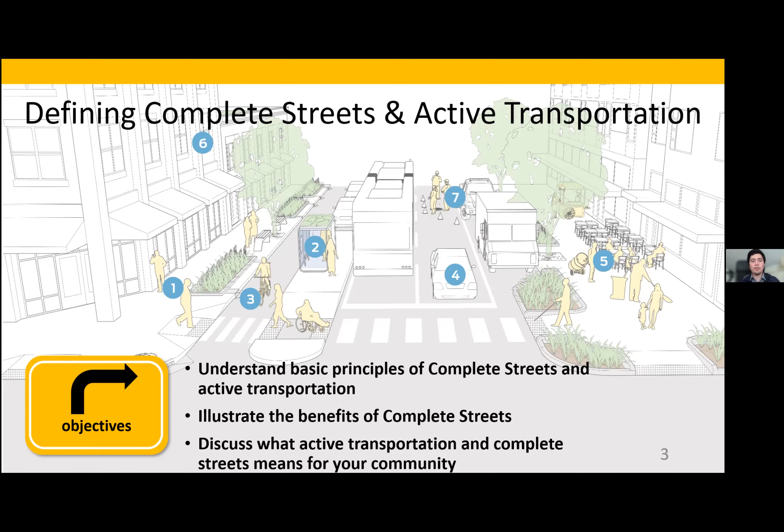There are a lot of tools to achieve that highest and best use, but ultimately it depends on what your priorities are and what you're trying to achieve. Yes, bike lanes are a tool. Yes, removing parking is a tool. But maybe it's not the tool that's right for you. So we're going to talk about all that as we go. A lot of content to cover, so here we go.

So what is active transportation? According to the CDC, active transportation is any self-propelled, human-powered mode of transportation. What's interesting about this definition is not so much what it's saying as where it's coming from. It's coming from the CDC, not DOT, not somewhere else. And the reason CDC is interested in active transportation is because physical inactivity is a lead contributor to many chronic health conditions in the United States.

Including obesity, diabetes, heart disease, and stroke. And active transportation is a potential tool that we can use to reduce some of these risk factors.

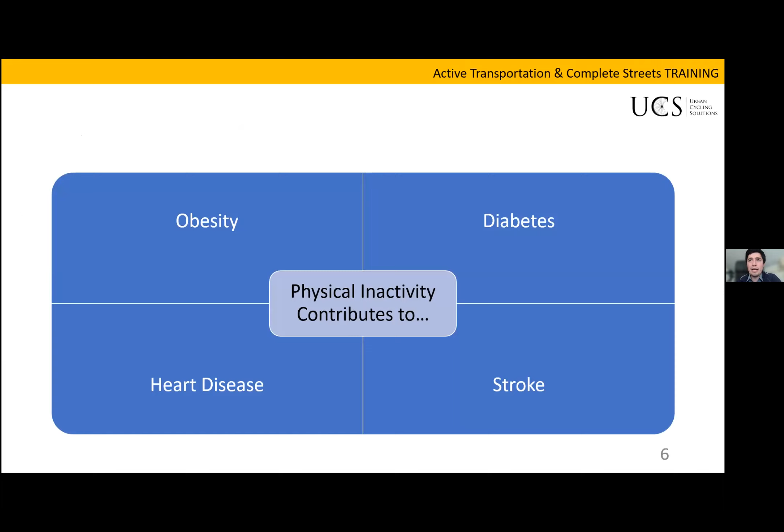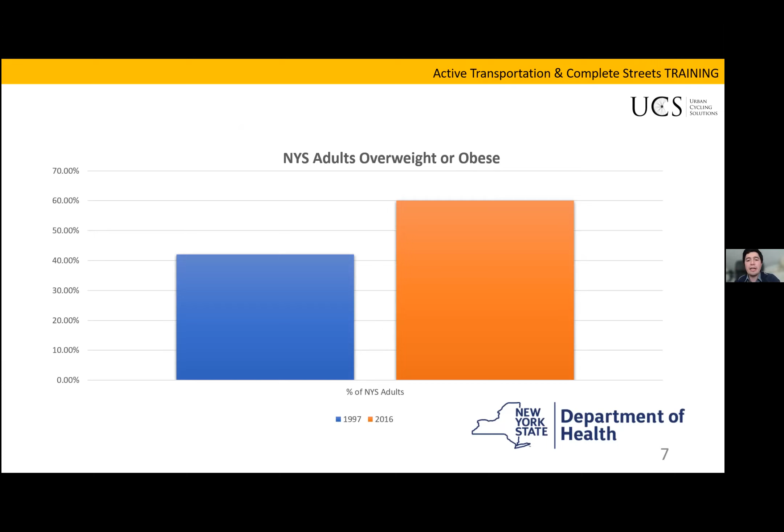If we zoom in specifically on obesity, what we find is that in 1997, just over 40% of New York State adults classified as overweight or obese. In 2016, that number jumped to 60%, so this is growing. In terms of cost, the state comptroller did an analysis in 2011 looking at the cost of obesity to the state, and they found that the cost of childhood obesity was $327 million, and the cost of adult obesity was $11.8 billion to the state. And that is a huge number.

And the reason that I bring this up is because a lot of communities that I go to think about things like complete streets and say, we can't afford this. This is great, but this is important—what are we supposed to do? When I see a number like 11.8 billion, I think we can't afford not to be thinking about ways to increase our physical activity. So, as you'll see later, complete streets is something that can be achieved with little to no cost in some cases. That's just something to think about in terms of framing this financially.

Now, if we start to think about physical inactivity, why is this occurring?

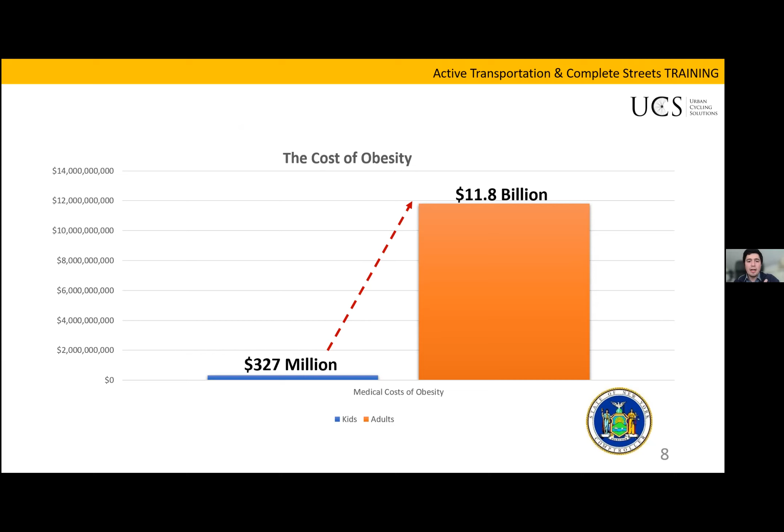Part of the reason is because Americans are spending more and more time in their cars because commute times are getting longer. And there's a variety of reasons for this. So there's population growth, there's congestion, there's really poor state of good repair. But that means that there are opportunities to reduce the amount of time that we're spending in cars. Maybe you can reduce your commute time by switching to a bike, or you can at least avoid congestion.

So if the CDC is right and active transportation is a tool for reducing our inactivity and getting us moving, why aren't more people getting out of their cars and jumping on bicycles or walking? Well, you can take your pick. There's a lot of reasons, whether it's poor pavement conditions, lack of safe infrastructure, wide intersections, congestion, fear of collision. All of these things prevent people from engaging in active transportation. And while some of these may be perceived, they are not unfounded.

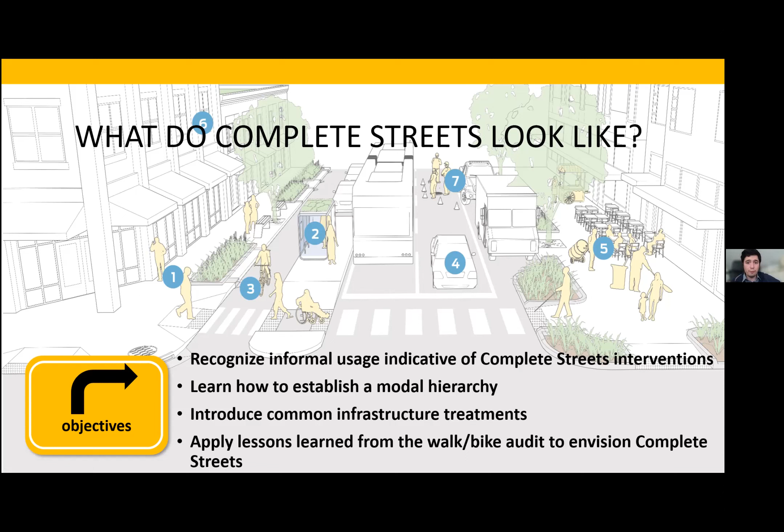That's something to think about. Clearly, people have found a path of least resistance. Maybe that's something we should formalize. Bikers tend to like to vet their routes and find the path of least resistance. So how do they get to transit? How do they get to local stores? That's going to tell you a lot about how you might want to think about planning a bike network.

Every community I've ever been to has sort of whispers of projects that have been around since God knows when. Like, oh yeah, that rail trail, they've been talking about converting that to a trail since the 70s. And, oh, that intersection's always been a problem, blah, blah, blah. These conversations stay alive for a reason. And for us as people thinking about improvements, we should be thinking about those questions. We should be thinking about those sort of rumblings and vetting them to see, oh, okay, there's actually an issue here, or there's an opportunity here for us to capitalize on.

And lastly, and most importantly, where are the kids hanging out? Do we have safe routes to our schools and to our playgrounds? Because that's really key. Kids are a really vulnerable population, and we want to make sure that it's safe and easy to get to the library, to get to school, to get to parks. So once we've started to think about patterns in our community and things that we want to address, we then start to think about design.

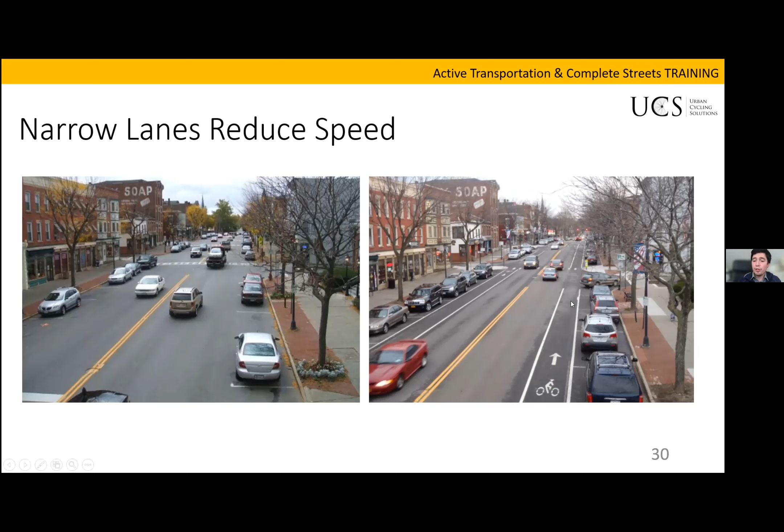So here's a quick example of what a road diet can look like. So here you have a really wide lane for cars, lots of wiggle room. Drivers feel a little more comfortable and they end up going faster. There's just a lot of ambiguity here as to how cars should be positioned and what other roadway users like cyclists should be doing in this context. Versus this, where we have narrowed this lane. And frankly, if you look at it, this is where vehicles essentially were anyway, and they still have plenty of, I think this is a 12-foot lane, so there's still plenty of wiggle room, but we've also enabled this additional use for cyclists.

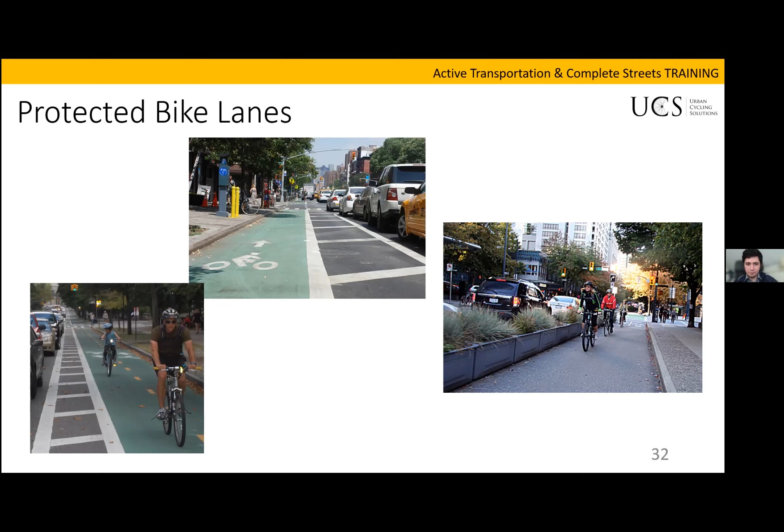Now, that's a pretty extreme treatment. The more common approach, or you're more likely to see a lot of bike lanes propagated all over New York State. So these are just paint. These are delineated spaces with paint on the road for cyclists. In some cases, you might see them painted a solid color in a really dense urban context, and that's to add visibility so that drivers are aware of other vehicles operating in the same space.

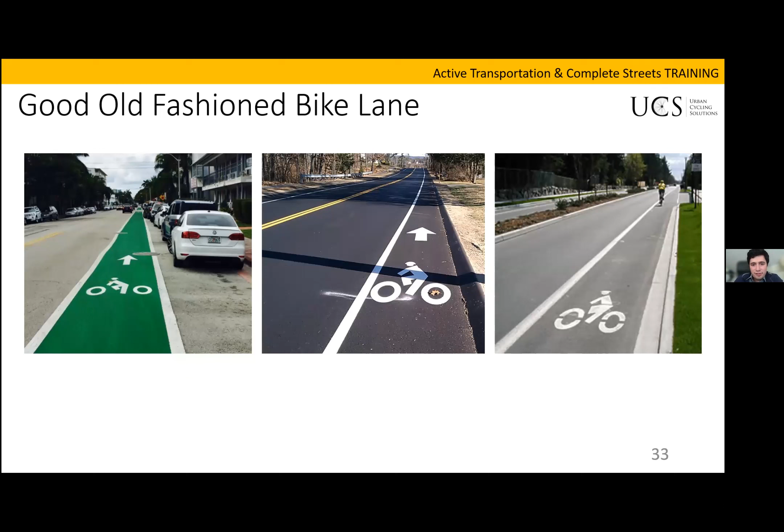One, it opens cyclists up to dooring from the driver's side door, but two, it encourages vehicles behind a cyclist to pass them even on a double yellow. And on a double yellow, the drivers aren't going to really want to take a lot of space. So they're going to potentially get really close to a cyclist who's sort of offset from the center lane. So if you're using shared routes, I recommend keeping them dead center lane.

These are not the strongest piece of bike infrastructure, obviously. Typically, these are used in short segments to connect to stronger pieces of bike infrastructure. So let's say you have two bike lanes or a bike lane and a trail, and there's not enough space to add a protected lane or a bike lane.

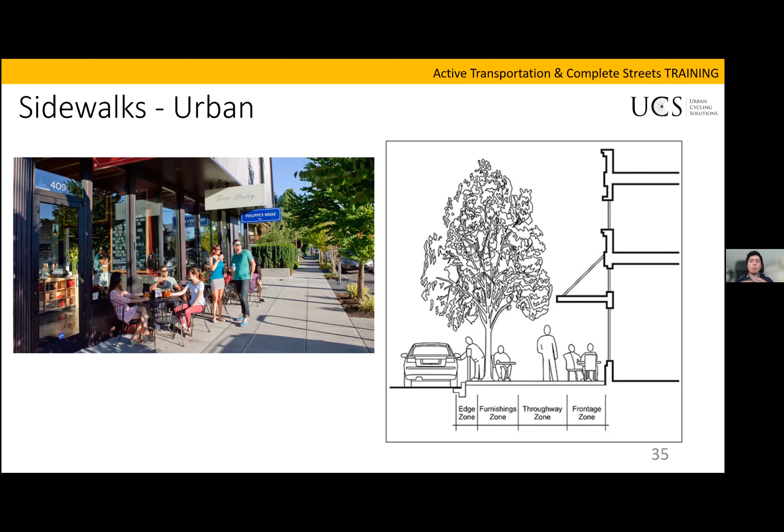I think what's really key on any sidewalk, you see there's a really nice dense tree canopy here. That's a feature that I think is really important. You read a lot about urban heat island effect and how disadvantaged communities tend to not have as much tree cover. That's something to think about in both a rural and an urban context.

So in really low density areas, it might not be advantageous to put in a sidewalk, but there are side paths and shared use paths. And these are essentially trails, mixed use trails for cyclists and walkers. And these are really great because they're fun to bike and walk on. They connect long distances, and it saves you from having to put in a sidewalk that may or may not be used very frequently.

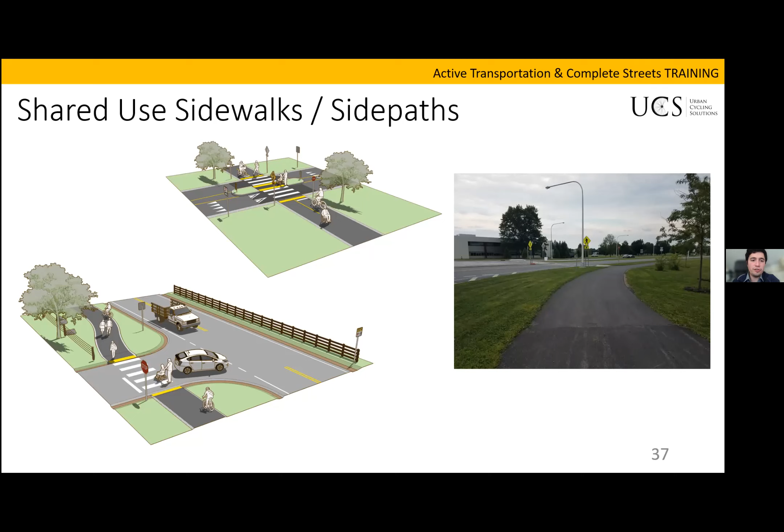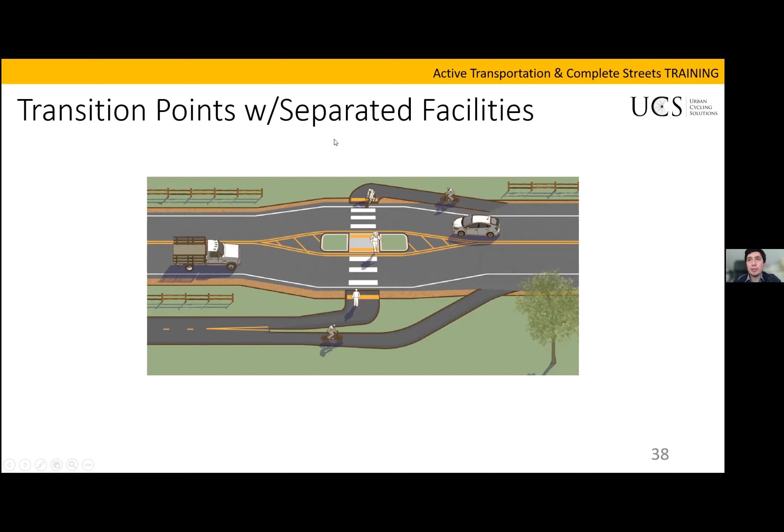Now, what's important with shared use sidewalks and side paths is thinking about connections, both on and off road. So in this case, you see this is a really good design example. What do you do with pedestrians? What do you do with cyclists? So making sure that cyclists have a way to transition both back on road and onto the trail. And presumably there's like a facility or something here for pedestrians to go to. That's really important.

So next, curb extensions. So one of the big challenges we talked about with roadway design was designing really wide streets for cars. Curb extensions are a tool we can use to shorten the distance between the curb and shorten the crossing. Curb extensions also serve a number of really great functions in that they protect pedestrians from turning vehicles. They also slow down traffic. So I love curb extensions. I think they're really helpful.

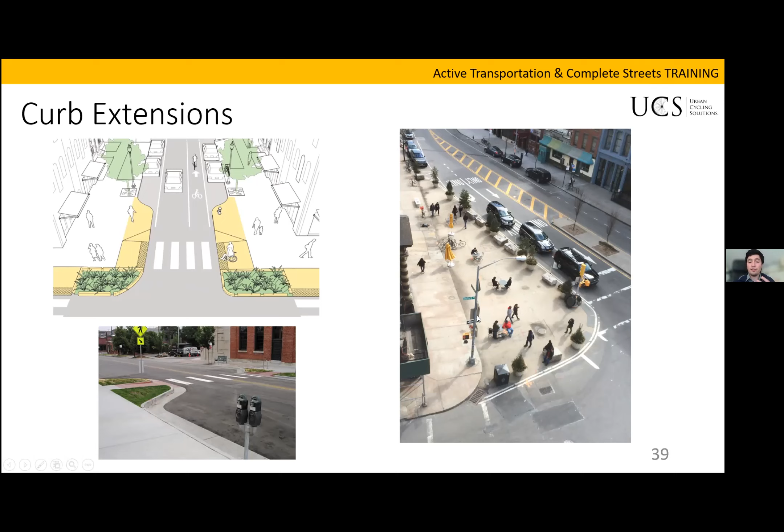Curb extensions can be hard in concrete, like you see here, or they can just be in paint and bollards, like you see right here. And in this case, this curb extension is so large, it actually becomes a new public space.

Speed bumps, everybody knows the speed bump. These are great for slowing down traffic, reminding drivers that they can't just speed up after they enter a specific zone. So you can put these periodically, say in a school zone or elsewhere, like a main street commercial context. These can be permanent or they can be bolted in, like you see with these rubberized versions here.

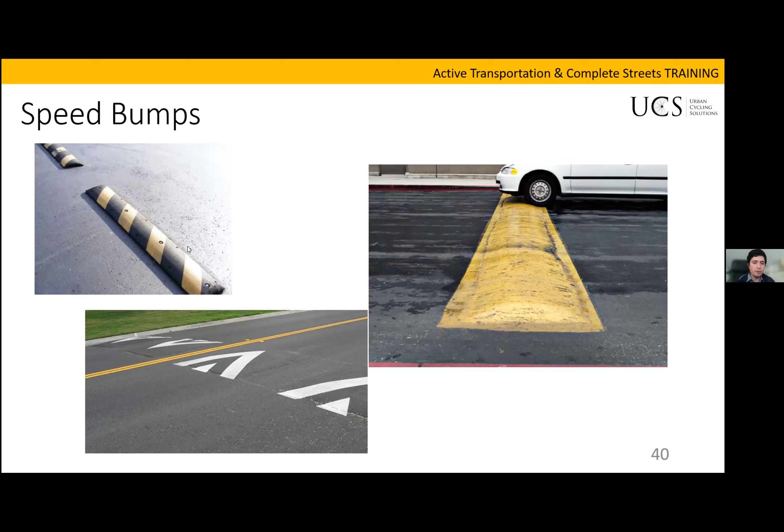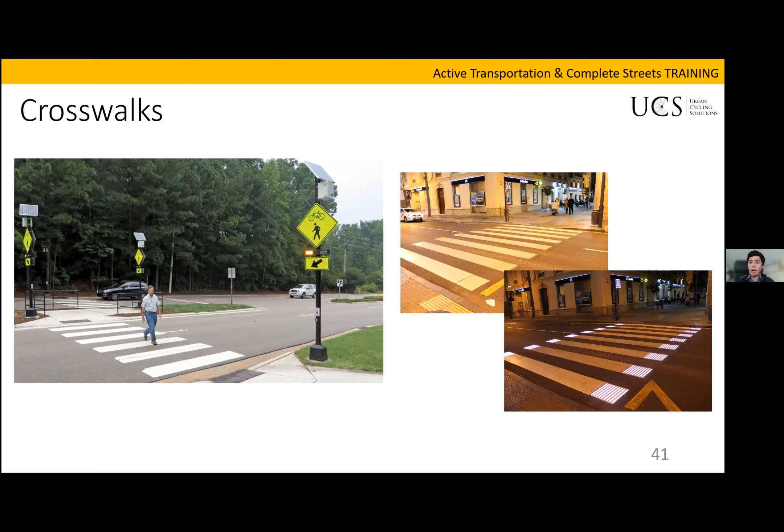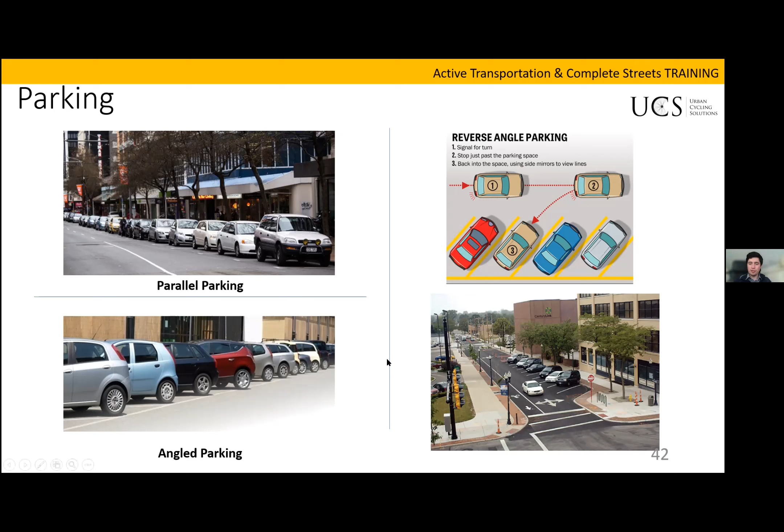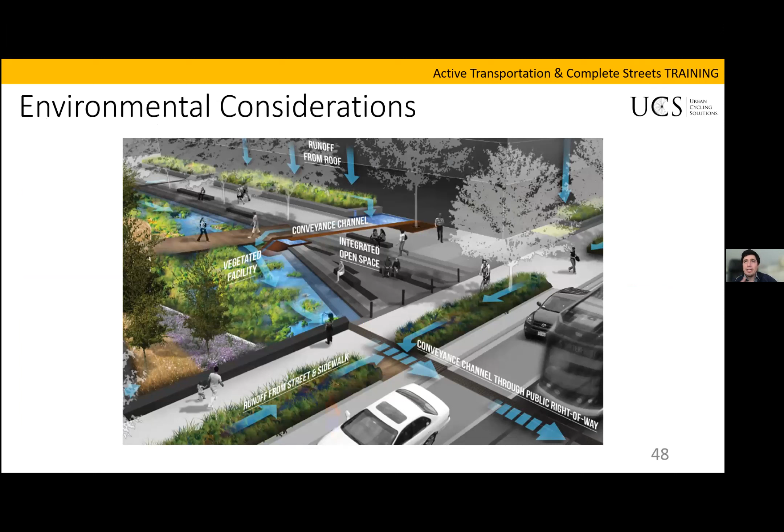So with that, let's take a walk. Let's do our walk audit. Before I do that, though, I'm sorry, are there any questions about complete street design tools for infrastructure?

Okay, hearing none. Let's take a walk.

So when I do a walk audit, typically there are three things. Number one is to be careful. I am going to trust everybody's safe behind the computers.

Number two is to think of all users. Katie and I were talking about this before we got started. You may pass the same intersection, the same sidewalk every single day and not give it a second thought. It works for you, no problem, move along. But how would a cyclist interact with your roadway conditions? How would someone in a wheelchair feel about a specific intersection? So I try to get people to think about different perspectives for different users.

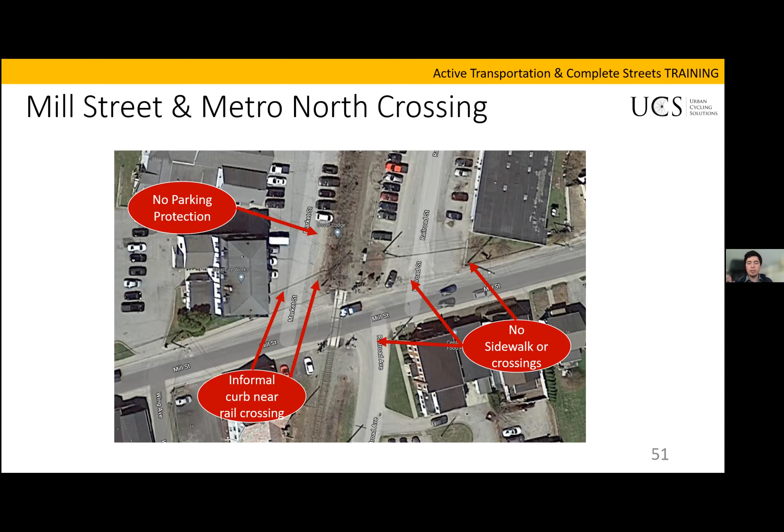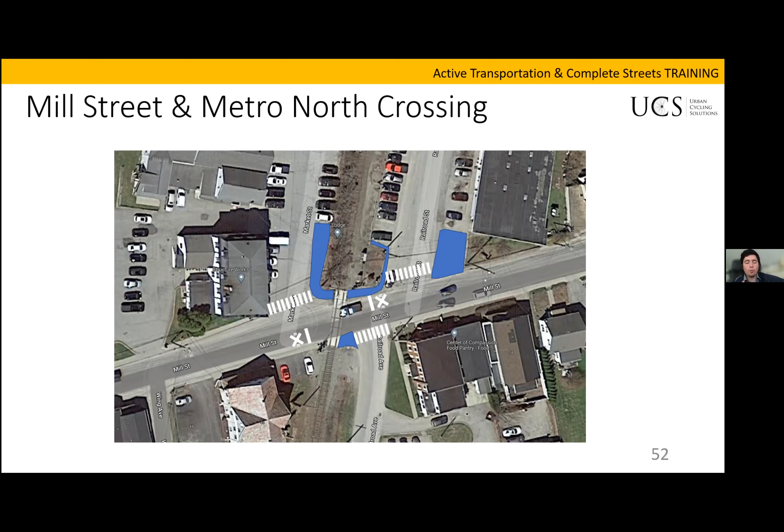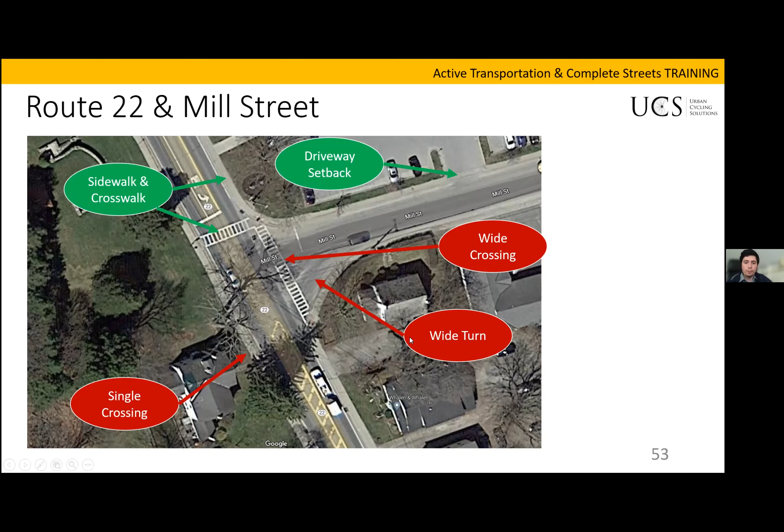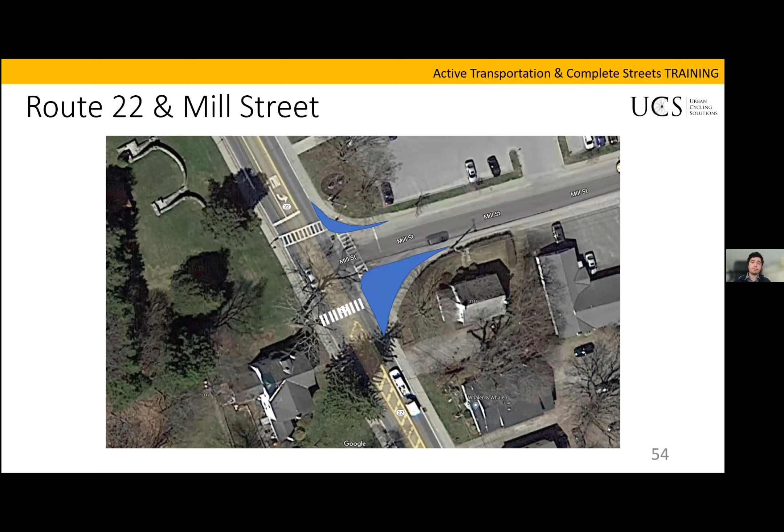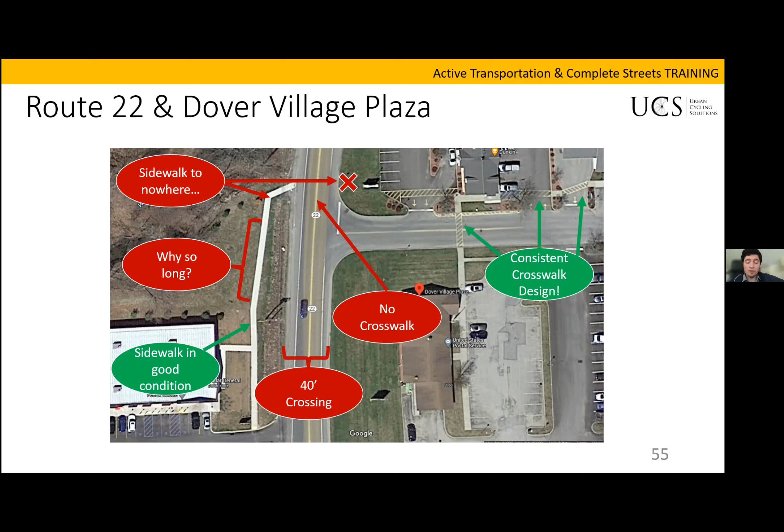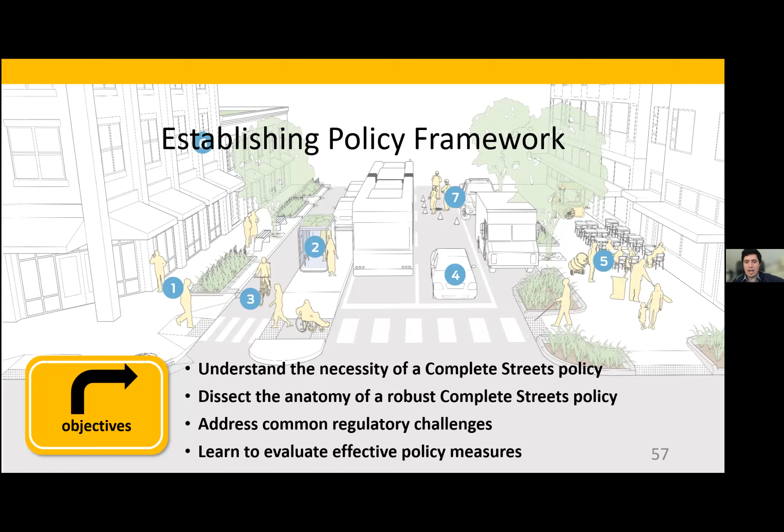I'm going to keep going, and we're going to talk about complete street policy. I'm going to be a light touch, we only have 30 minutes, and I want to get through content and give you all a chance to ask any follow-up questions. So with policy, why do communities need a complete street policy?

Policies are important because it's an official mandate to work towards an integrated transportation network for all users, as well as the establishment of a reporting framework so we can track the success of street improvements. One of the things a really good complete street policy will do is prioritize design treatment. So think back to the stepladder we saw earlier in the design section of the presentation.

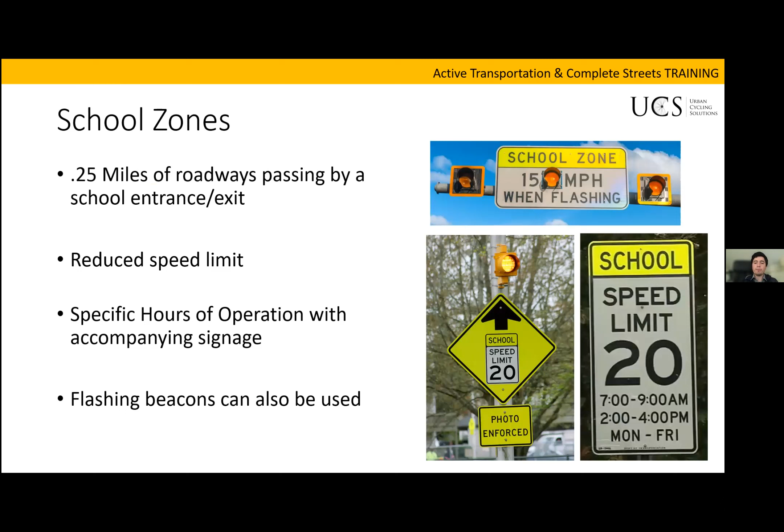Did I miss something? So something else, I talked about school zones earlier. You can wrap sort of design packages into your policy, and this is typically applicable to bigger communities, but there's no reason you can't do it on local streets. If you create local school zone criteria, that can be baked into your policy. Similarly, here's a case study from New York City.

New York City created these neighborhood slow zones, which again, it's a design package. They created criteria that says, okay, if you apply for this program, we can take a 5-block radius and we have a package of design treatments to A, lower the speed limit, B, increase bike accessibility, C, increase pedestrian safety, and we can do all these things in a targeted fashion.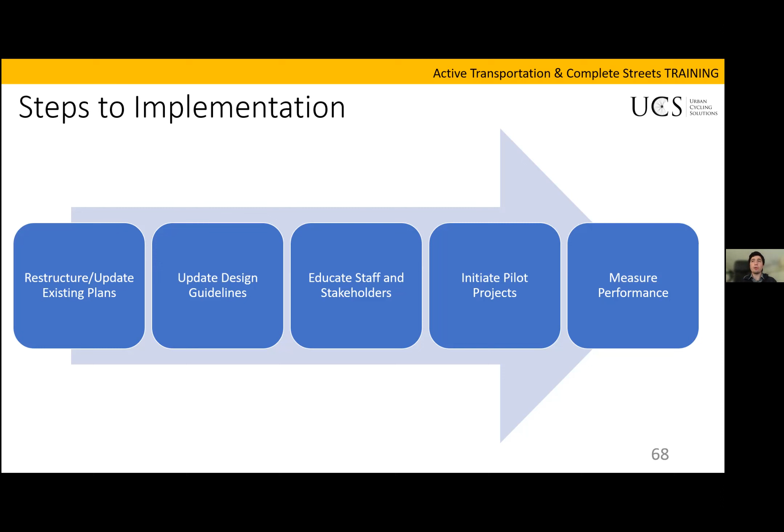And then lastly, and I would argue almost most importantly, measuring performance. We need to be able to demonstrate the success of these things in order to keep them going and in order to maintain them. So how do we achieve complete streets? We can do it without spending a lot of money, without a lot of red tape. One of the ways we do that is with short-term pilots.

This is a very, very famous pilot where in 2009, New York City DOT decided to shut down Broadway in Times Square because the sidewalks were just too tight. People were falling off the sidewalk all the time. So why not just shut it down? In order to avoid a lot of red tape and a lot of screaming, they did a pilot, and it was hugely successful.

And ultimately, if you go to Times Square now, God forbid, I avoid it like the plague, but if you go there now, it has become a permanent staple. People love it. There's permanent seating. People are always walking there, and it's a huge success. And it's been expanded, not just in Times Square, but different locations down Broadway. So a pilot can help you streamline that implementation, get past red tape, demonstrate that something works, get the community engaged and get them excited, and then attract new funding sources to expand these types of principles.

Another way we can implement complete streets without a lot of capital expenditure is with tag-along projects. So when you mill a street, you're going to have to repaint it anyway once you mill it, right? So why not just change the design in advance so that when your street painter comes out, he has a complete street design ready to go, ready to implement. That avoids you the capital cost of erasing and restriping the street. It avoids the staging costs associated with that. You're able to get a lot of bang for the taxpayer's buck by just creating a new design in advance.

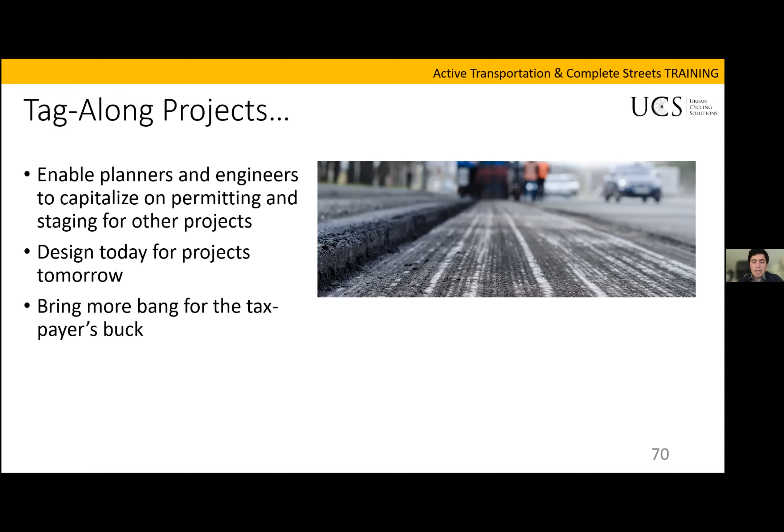So a couple myths about complete streets that tend to hold up implementation. Let's go through them. So first, businesses often get upset, especially if you start to take away parking. But studies show that the opposite is true. Businesses abutting complete street infrastructure, things like large curb extensions and bike lanes, tend to see increased commercial activity and increased customer satisfaction at the businesses. And also business owners tend to be more satisfied in surveys of owners.

And also, I know it's tongue in cheek, but theoretically, if we do complete streets right, we're reducing traffic accidents and thereby reducing the need for emergency services. I get it. That doesn't necessarily reduce fires off street or anything like that, but it's not inconceivable that there would be less need for emergency services, at least on the street, if we do these complete street treatments.

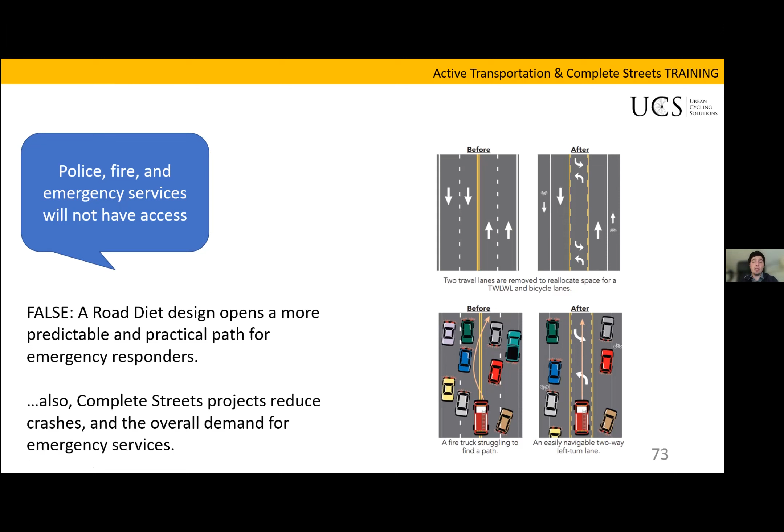We don't have the money for this. As I just showed you, you can restripe a street with almost no cost if you have a design ready to go during a street milling. Same goes for utility work, by the way.

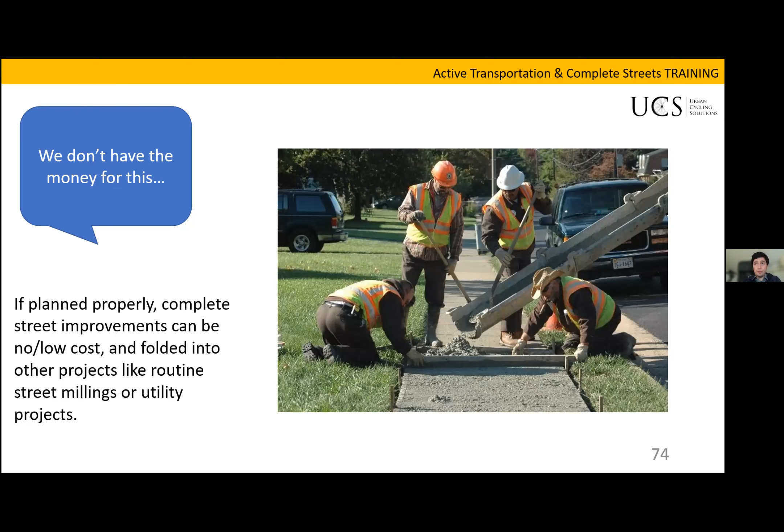And then my favorite, it just doesn't work here. Our community is too unique, or we're not Portland, or we're not New York City, et cetera, et cetera. But here's the thing. It's the unique elements in a community that make complete street projects really special. The whole point from the beginning, I've said, is to maximize the highest and best use of our space and create places that people want to live, work, and play in.

And every community has a different flavor and a different feel. So it's important that we capitalize on those. And for visitors to Dover, we're showing people what Dover's all about through our streetscape. That's what we're trying to get to.

So funding, I don't want to spend a lot of time on this because we're short on time, but there are a lot of federal funding sources out there. There's a lot of state funding sources out there. I'm sure Emily can give you a lot more information about how federal funds flow down to local communities. The MPO has a pretty important role in that. There are state funding mechanisms. There are private, like foundation grants that you can get for smaller projects.

But speaking generally about funding, property owners probably are never going to fund a project, but as I've said before, you can get an easement on their property if you're trying to build a trail or a sidewalk, if they're amenable and if it adds value.

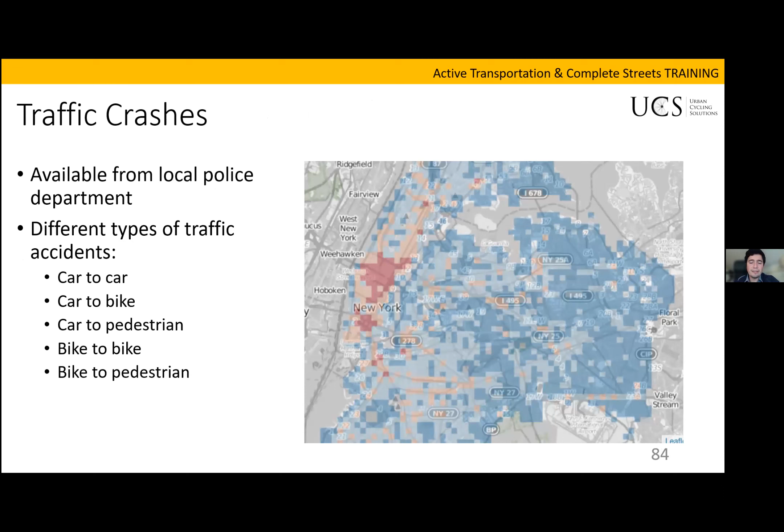Traffic volume, lots of different ways to measure traffic volume. You can look at the number of cars, bikes, or pedestrians on the street. At an intersection, you can do what are called vehicle turning counts, and you can see, okay, at this intersection, we tend to see 10 vehicles making right turns versus 5 vehicles going straight, midday in the fall. There are different ways to do this. There's the intern method, as I call it. Those are manual counts. I've done them many times, and they're fun, and then they're not after a lot of them.

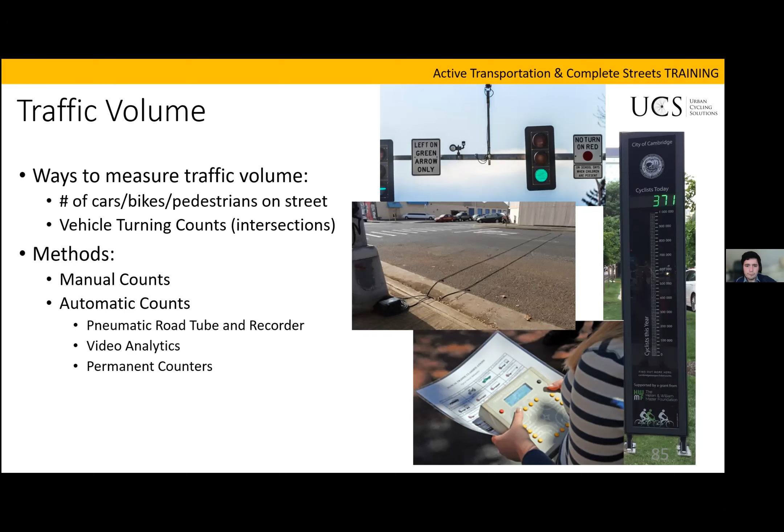Traffic speed, again, your police should have at least speeding data. So if you're not regularly monitoring speeds, or you're not going out and doing a speed study, you can go to your police department and say, hey, we want to know where the highest instances of speeding are in our community. They can give you that data.

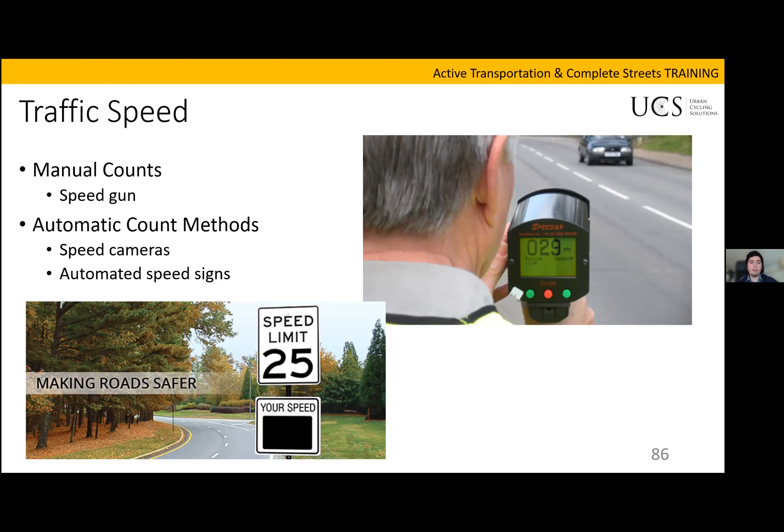Economic vitality, there's a number of different things. So commercial activity, businesses may or may not be forthcoming about their revenue, but you can always look at sales tax receipts from businesses in your community. As far as business engagement, you can go out and you can do counts of visitors that are in local establishments. You can look at pedestrians seated outside if you have any outdoor seating. You can do user surveys. You can survey business owners.

Commercial vacancies are a pretty big indicator of economic vitality, especially in your denser commercial core. And you can look at the number of building permits. You can look at the number of vacant storefronts. Just a lot of different ways that we can sort of slice and dice economic vitality.

Downstream outcomes, public health, we can look at asthma rates and obesity rates, public safety. It's interesting, the crime rate can go down fairly quickly if you do different things with a main street or a particular area. But I've found that perceptions of safety take a longer time to change. So, if you do surveys, you would get at that kind of data. And then environmental, air quality and water quality take time to change unless you have a COVID level event where people suddenly stop driving.

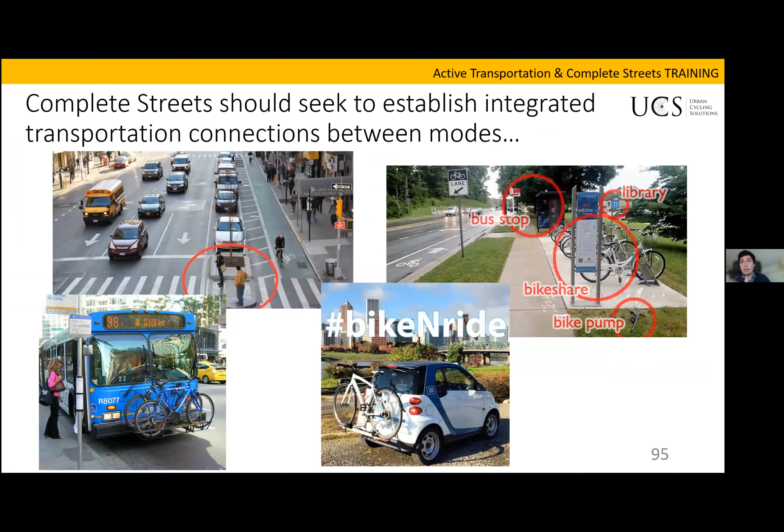So to review, active transportation is any self-propelled human-powered mode of mobility. Complete streets are streets designed for everyone. There are many tools, like a lot that we didn't even talk about today, to achieve complete streets. Complete streets should seek to establish integrated transportation connections between modes, so transit, pedestrians, bicyclists, and cars. Don't forget about freight mobility. It's really important. Complete streets policies set the tone and establish guidelines for future street improvements.

Implementation is complicated, but we can streamline it with cooperation from partner agencies and education of key stakeholders. Evaluation is absolutely critical to tracking success and setting community goals.